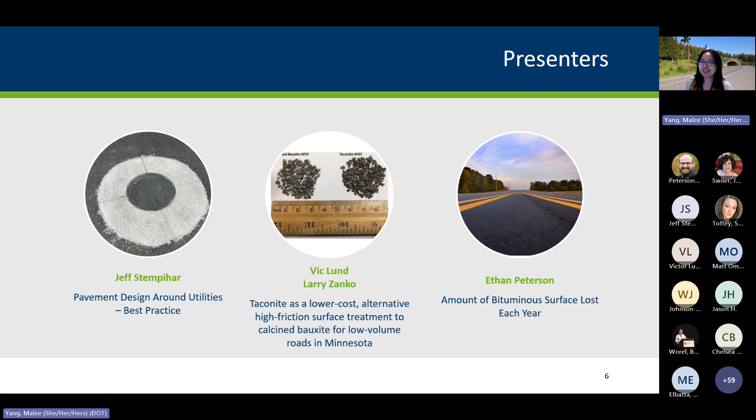The first one we'll kick off is talking about a study we did a couple years ago on pavement design around utilities best practice. This is very useful for local agencies. Utilities can be a source of maintenance, and so this gives some guidance on what we learned through various means of collecting data.

Some of the background is utility covers, they're typically adjusted during asphalt concrete paving projects, also concrete paving, but for local agencies, mainly asphalt concrete. They include catch basin inlets, manhole covers, and also gate valve covers.

Distresses are more pronounced in cold climates, such as Minnesota, especially when there's wet freeze and freeze-thaw cycles. Some of the impacts are reduced ride quality or potentially safety issues if there's large potholes. They can also damage snowplows that can impact the structures if they've raised up or if the pavement is settled. And then there's also additional maintenance cost to the agencies.

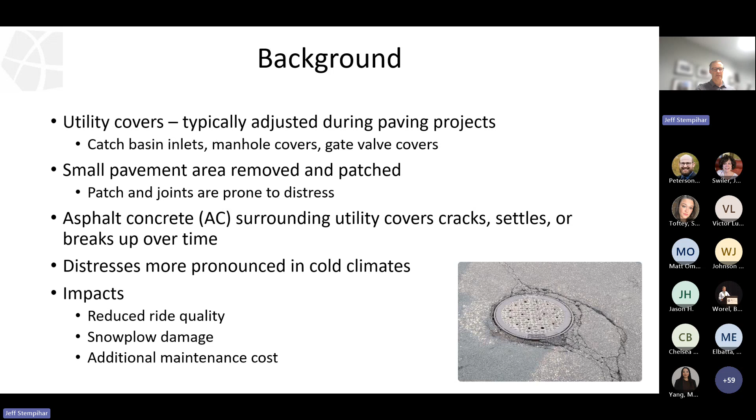There are two main types of cuts and materials used to adjust these structures. On the left, probably the most common is the square/diamond cut, and it's typically patched back with asphalt concrete material. The second one, and you'll see these throughout the presentation, is the round cut. It's after the paving is done, this one, contractor comes back and they actually core out or jackhammer out around the structure, and then they fill it with concrete material. In our study, this is used by fewer agencies, but it's gaining popularity and it's performing well.

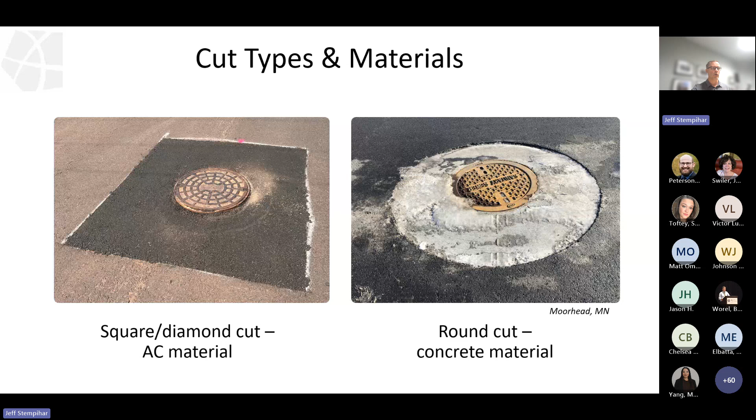How did we collect data? Well, we did a literature search, and without surprise, it's not well documented in terms of performance. But the key driver was the electronic survey sent out to agencies in Minnesota and in surrounding states. We received 28 responses, which I felt was really good. Most of them were local agencies, one engineering consultant and one supplier. 67% of the responses were from Minnesota, a couple from North Dakota and one from Wisconsin. 5 of the agencies we contacted for detailed discussions and gathered a lot more information.

These graphs show an example of the information we collected. So on the left is the collar, material, and cut shape. And if you look on the bar that's around 70% total, most agencies use asphalt concrete for the patch and the square and diamond cut shape. But you can also see some use the round cut for concrete and asphalt.

On the right, when is the utility cover adjustment made? 76% reported that it's prior to paving the final surface lift. Some do it after, but I want to note that this is a key finding in the study, and we'll talk about it later. So keep this in mind, that prior to paving the final surface lift is important when you use asphalt concrete.

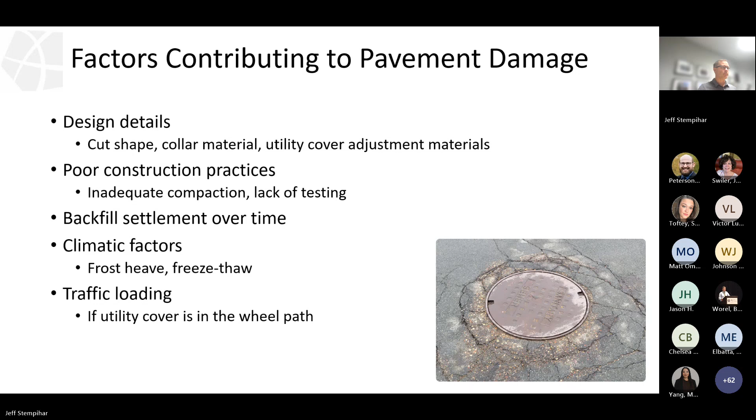I want to highlight a typical sequence of the square diamond cut. This one was shared with us from the city of Woodbury. First image is you cut out the pavement in a square or diamond shape, depending on the orientation with traffic, and expose the structure itself. After thoroughly cleaning, image 2 is they're actually installing plastic adjusting rings to get that cover to the right elevation.

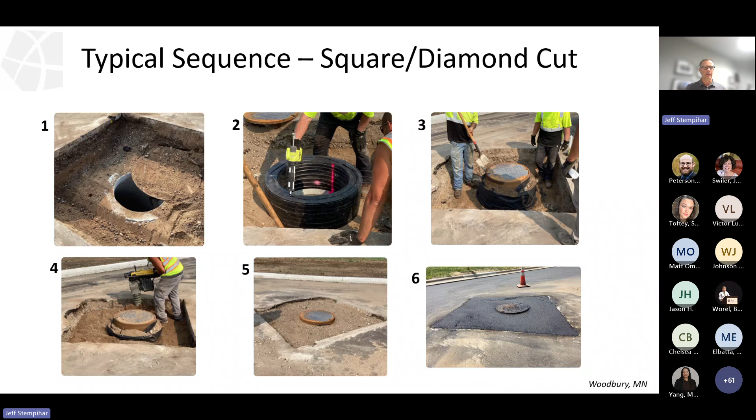Once it's at its elevation, the city actually uses a geofabric to wrap the structure to keep the intrusion of fines over time or to minimize it. They highlighted that it's very important, when backfilling, to use adequate compaction and do it in layers. Don't just fill the hole and then try to compact the whole lift of aggregate material. Image 5 shows the final, or the prepared base ready for asphalt concrete, and then 6 shows the patch in place. You can see there's still a gap at the utility cover because they're going to pave the final lift over the top of this.

I'm not showing it, but the sequence for a round collar is, as I mentioned earlier, they pave all the lifts. Sometimes if it's an overlay, they pave right over the structure cover, come back, core it out, or most commonly jackhammer out in a circle and then fill it back with concrete.

So now highlighting some successful regional practices that we found in the study. In terms of collar, material, and cut shape, a one-size-fits-all approach was not identified. Agencies have their preferred method, and based on some local tweaks to the process, they feel like they're getting decent performance.

So the study doesn't come out and say, hey, you should do this method. The square diamond with asphalt concrete has reported success, mainly if you do the work before you pave the final lift. Round cut, fewer agencies are using it. It's more on a trial basis, but it is reported success also.

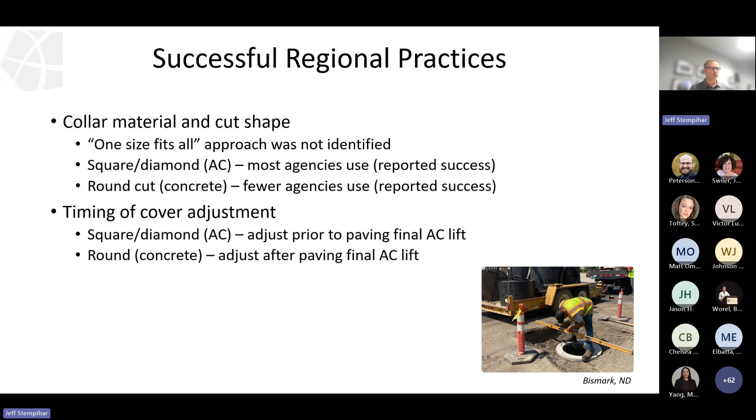In terms of adjusting the cover, as I mentioned several times because of the importance, it's important to adjust it prior to paving the final AC lift. If you pave the final asphalt concrete layer, come back and try to adjust and do the patch, typically the distress is accelerated, it shows up sooner and it's more severe, and you now have a joint at your surface around that patch. And again, with the round concrete, it's important, this one's done after paving the final AC lift.

In terms of the utility cover adjustment materials, there's standard materials and there's also commercially available products. Some things that came out is if you're using the concrete adjusting rings, the grout can fail early. There are non-cementitious adjusting rings that are showing promise, such as plastic that I showed you in previous slides.

And then there's also steel adjusting risers that can just clamp onto the structure, the existing frame, and then raise that up the right amount so that you can pave around it and put the new cover on without having to cut and patch the AC.

Sealing is very important, as I mentioned, geofabric. One agency actually casts the entire structure into concrete to help mitigate fines intrusion over time. Plastic adjusting rings were mentioned as a way to help have a better seal. There's also some commercially available products, floating castings.

Example is shown on the right. If you could see, there's a slot and some bolts so they can actually adjust the cover height. And this minimizes the need to patch as much, especially just in overlay situations.

You can see on the top, an example from Bismarck, this is an adjusting frame and cover. And you can see there's kind of a darkish red underneath the collar, and that's the part that's been adjusted up to the elevation of the final AC lift.

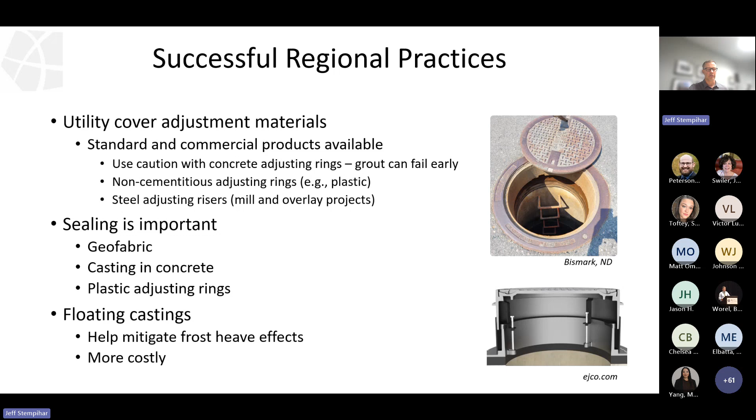Some agencies reported that these floating castings can actually help with the frost heave effects of the entire structure because it can be adjusted, but they are also more costly. And I have to mention the disclaimer: I grabbed this image from a commercially available product. The report doesn't endorse or recommend any specific products. These were just what were recommended to the researchers, or were shared with us during the study by agencies that use these products.

In terms of underlying material support, well-draining granular backfill material is very important. Adequate compaction, this can't be stated enough, is to get that compact in layers. You're working in a small area, so you're not going to get a roller in there, so you have to do the best you can with equipment that's available.

Again, compact in layers. In terms of testing and inspection, simple things to look at is make sure the structure is actually adjusted according to plans. Check that it's at the proper grade and slope so it matches that of the surrounding street. Attention to detail is important, okay? Check that it's sealed properly. Check that the contractor's cleaning the surface before they install the risers. Test density, that's on the backfill and the asphalt concrete.

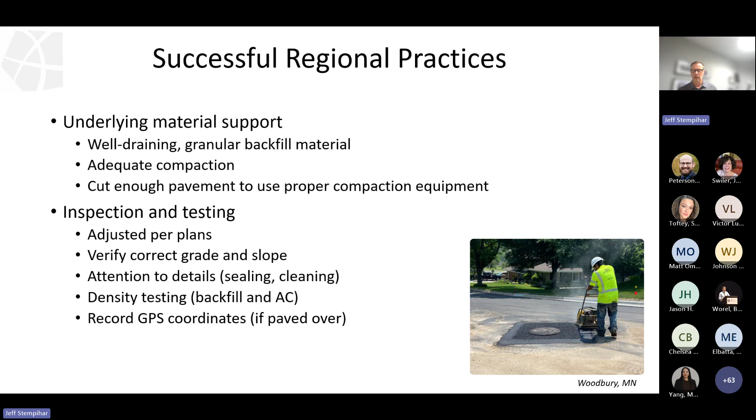And then if you're going to do the pave-over method and come back and do the circle cut, make sure you record the GPS coordinates or survey it so you don't cut out random areas and then have to patch areas of pavement where there is no structure.

Some other takeaways: the performance around utility covers is just not well documented. It's not something that gets into asset management plans, and recurring pavement inspections are not focused on utility covers. They look at the street itself. Most agencies said this is typically inspected during a design phase for a street or if there's a public complaint. So one idea that came up is to collect some information during pavement management inspections. You could ask your team doing the work to collect a sample around the city so that you can document how your structures are performing.

We found that maintenance is generally reactive, and respondents felt that we should move to a proactive method to slow deterioration. This could be active crack sealing and patching, not just in response to public complaint. And technology transfer across agencies is difficult. Folks are tied up with their responsibilities and roles, so oftentimes two adjacent cities aren't even discussing what they're doing to help improve their practices.

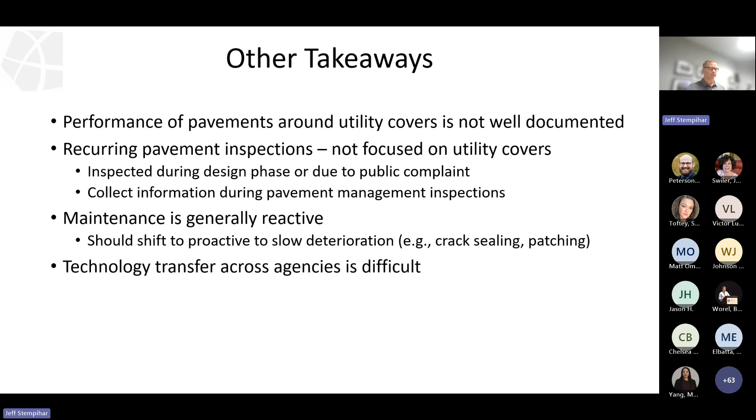Then we wrap up with a sequence to help folks evaluate and modify their practice. This is an iterative process. The key first step is you have to inspect. You need to know what you have out there and document the condition. You may find that your utility patches are performing well. It's not always the case, but you may be satisfied with the performance. The next step would be to evaluate your practices. Are we doing everything we can to ensure long-term performance? That might be reviewing your specifications, reviewing inspection and testing procedures, and taking an overall look at your practice.

The next step would be to conduct trials with improvements such as different cut shapes, different materials, different specifications, going back to the process of inspecting and going through it. Once an agency's happy, that's when you can implement it and make it standard practice.

Some other key takeaways: it's very important to have an internal champion or champions to drive the process. If there's not someone leading the effort, it oftentimes falls by the wayside and doesn't take shape. Collaborate with your neighboring agencies. There's a lot of information out there, and you may be able to collectively find strategies to enhance performance, then find what works best and implement it. As people learn your new practice, over time you'll get better performance.

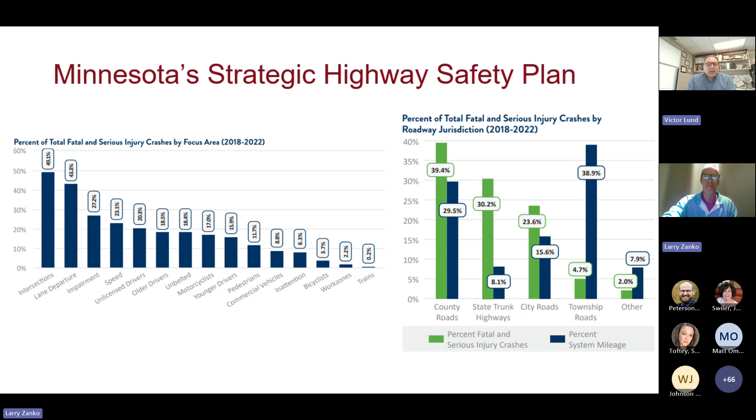Next slide. The Strategic Highway Safety Plan actually discusses high friction surface treatments as a strategy. It's a newer safety strategy that we're trying in Minnesota and nationally, but certainly it is a strategy that we need to be considering. Next slide.

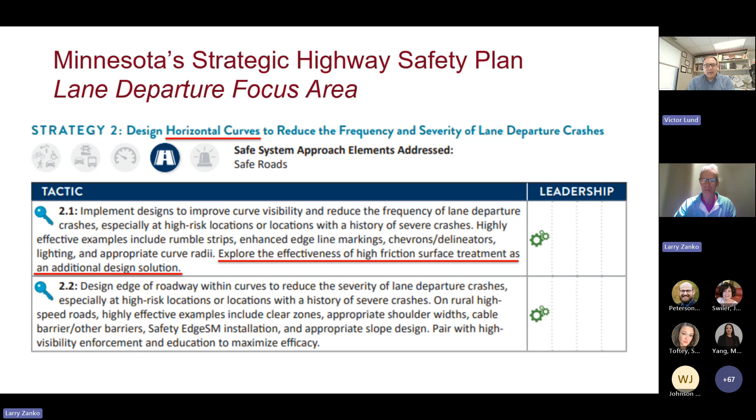All right, so if you picture when you're a kid and twisting a ball around your head with a rope on it, that rope provides the tension for the ball so the ball doesn't go flying out into space. That's what happens between your car tires and the pavement surface. Your tires are the rope to keep the car from going off the roadway.

And we think about improving curve safety. There's three variables: there's the radius, there's the superelevation, which is the subscript E, and then there's the friction, the factor F max. If we're going to reconstruct a curve to improve the safety of that, you'd have to reconstruct the radius, which is the R value. You'd have to reconstruct the superelevation, which is the slope of the curve. But we really don't have a lot of funding for that type of effort to go around reconstructing all these curves all over the state.

And again, they're the primary generator of all these serious lane departure crashes across the state, okay? So from just simply a cost management standpoint, we don't have the funding to reconstruct, but we do have one lever to pull, and that is the friction value. And so the ability to increase the friction value in that horizontal curve so that it reduces the likelihood of a vehicle running off the road, particularly if a driver is entering the curve at too high of a speed for the maximum speed for that curve.

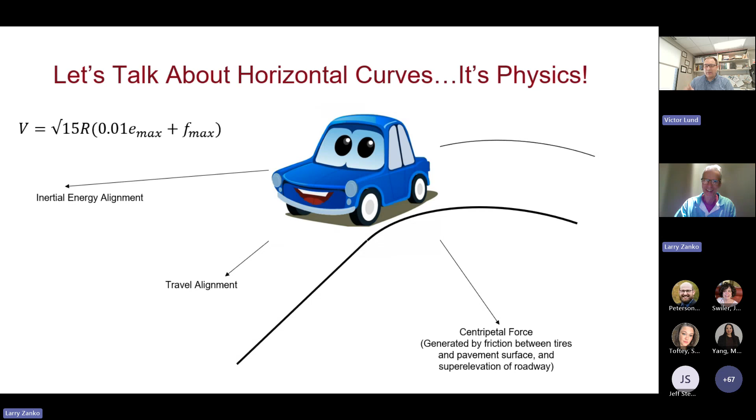My vision as a county engineer for this high friction surface treatment stuff, I think it's definitely a safety strategy of the future. We have very few tools in the toolbox to improve safety, particularly for lane departure, and this is one of those strategies. Currently very expensive, but as you're going to see with the presentation, we might have an opportunity here to utilize a lower cost HFST, high friction surface treatment, that will allow us to deploy this to much larger volumes of curves. So thanks, Larry. Go ahead.

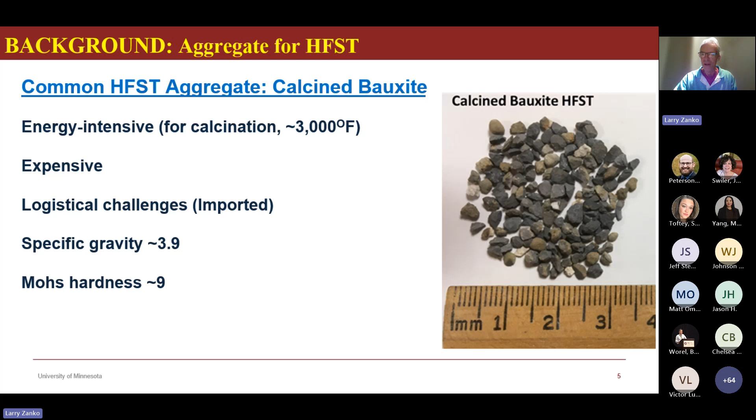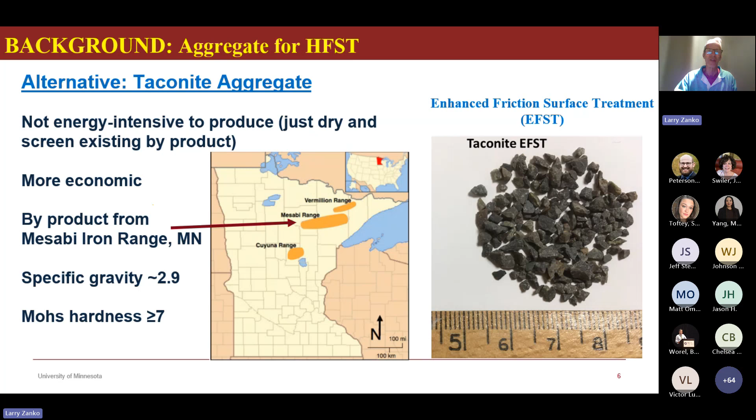The alternative that we looked at during this project is taconite aggregate. It's not energy intensive to produce. It's essentially just drying and screening an existing byproduct, which are taconite tailings from the iron mining industry in Minnesota. It comes from the Mesabi Iron Range, shown by the arrow there, and has a specific gravity about a quarter less than calcined bauxite, and its Mohs hardness is greater than or equal to 7. So not quite the same hardness as calcined bauxite. But we wanted to show these two aggregates in a side-by-side application and assess how they performed over time.

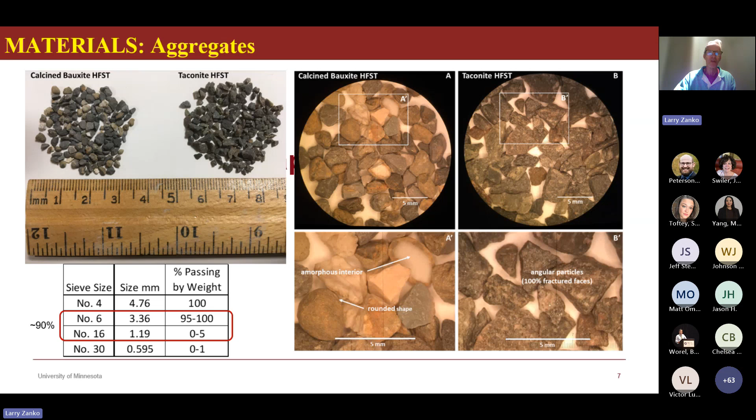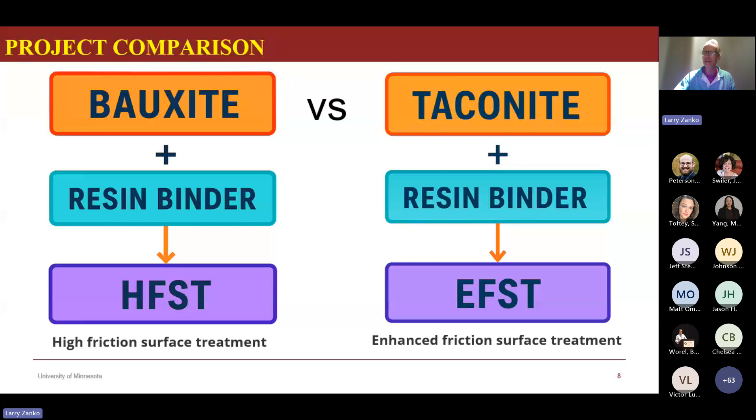You can see the microscopic images, the taconite on the right, generally 100% fractured faces. That's just the nature of how the material is made by the processing of taconite iron ore. The bauxite on the left; the spec for the size distribution is shown on the lower left, roughly 100% passing the number 6 screen, and very little passing the number 16. So those are the two aggregates side by side. The thrust of the project was to compare bauxite versus taconite, referring to taconite in our case as an enhanced friction surface treatment, or an EFST.

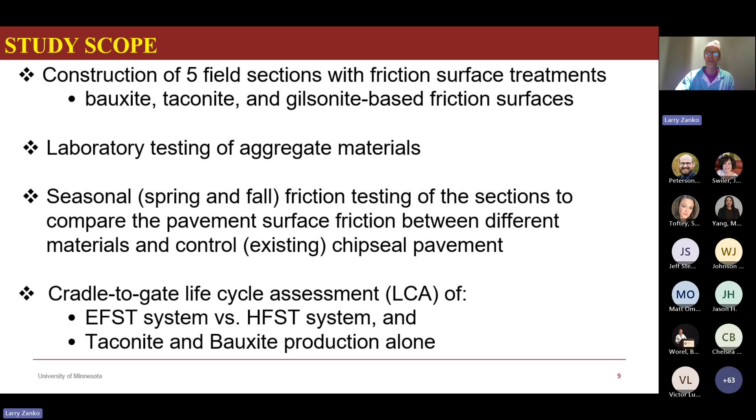The scope of the study was to construct 5 field sections with friction surface treatments, bauxite, taconite, and then we also looked at a gilsonite-based application, which is more of a pavement preservation, but with taconite applied. Laboratory testing was done. We did seasonal testing, spring and fall, before and after snow plowing, throughout the project, and also conducted a cradle to gate life cycle assessment of the systems themselves, and then the production of the material alone.

The test sections were located again on County State Aid Highway 15. We refer to that as Munger Shaw Road. And 5 sections that we looked at: the control, which we call number 0 on the south, continuing north, the 2 gilsonites, and then the focus of this project was really on the 2 HFST type systems with taconite and bauxite,

again, as the focus. I wanted to point out that in 2020, St. Louis County installed a calcined bauxite HFST on the horizontal curve just to the south of our test site. So that's that inset on the map on the right.

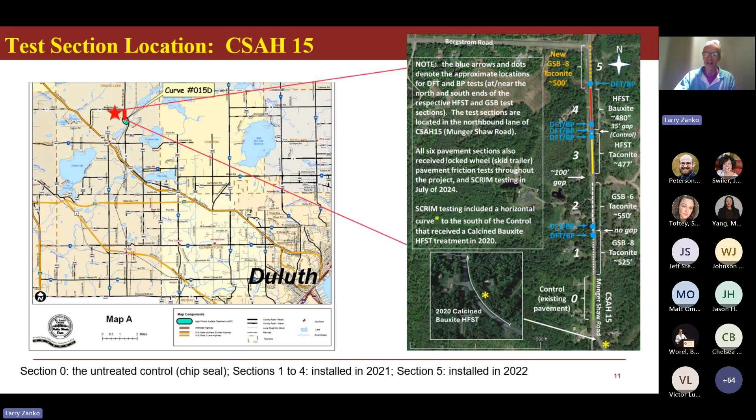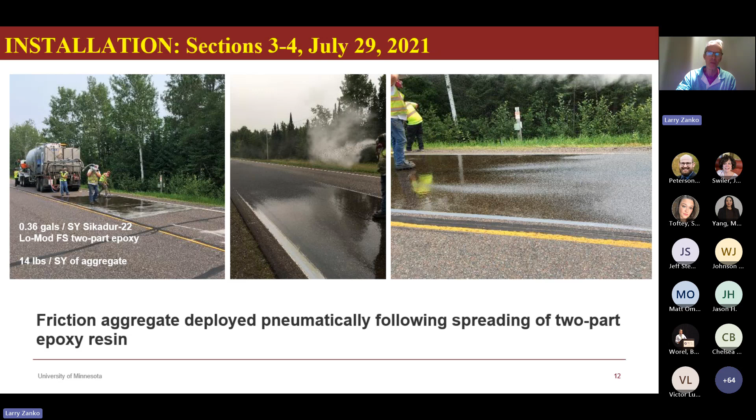Installation was pretty straightforward. That was done on July 29th of 2021. A 2-part epoxy resin was put down. The aggregate is broadcast pneumatically and spread over the surface of the resin, and that's essentially how it's done. There's another option where an automated system can be used as well, as opposed to the pneumatic. In this case, a pneumatic system was used.

Following installation, this is what the material looked like. The taconite on the top in the middle, shown next to the existing chip sealed pavement, and then the bauxite below that. Again, the 2 aggregates on the right, just for reference.

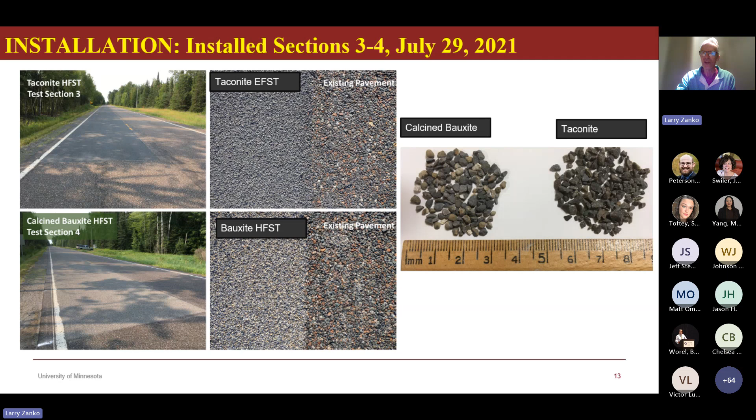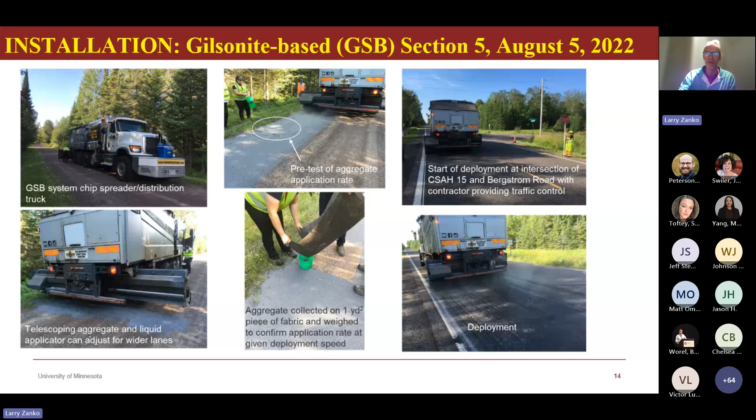The gilsonite-based, or what we call GSB systems, used a chip spreader distribution truck that deployed the pavement preservation emulsion and the aggregate simultaneously. It's very quick installation. To do one of the test sections, it took about a minute. Then it requires some time for the emulsion to break and set. But it's a different type of an application. This is not a substitute for HFST. We just wanted to look at a potential option for using taconite material as an aggregate.

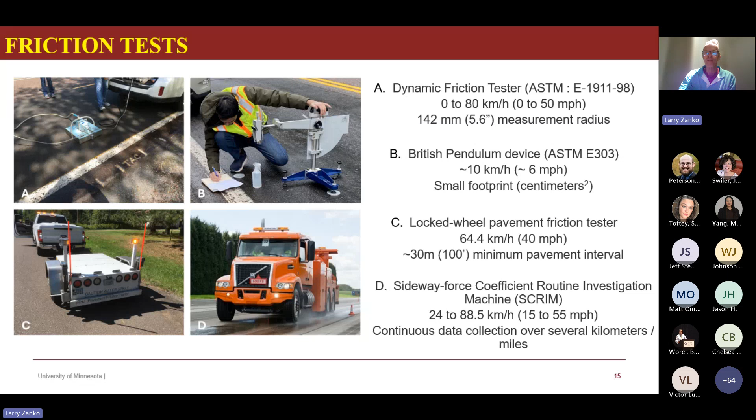Friction tests included 4 types: dynamic friction tester on the upper left, British pendulum shown there on the upper right, locked wheel pavement friction tester by MnDOT, lower left, and then the SCRIM, which is the sideway force coefficient routine investigation machine. I'll only say that once. We'll just call it SCRIM. And those were the 4 methods that we used to evaluate the pavements.

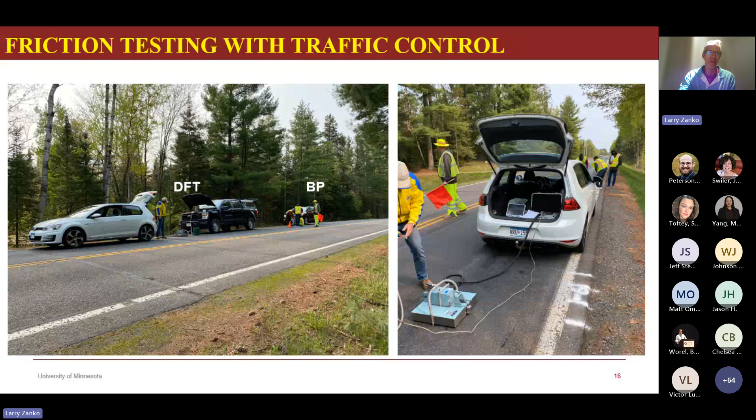Friction testing began, of course, with traffic control. St. Louis County provided that throughout the project. We would set up with the DFT and the BP simultaneously. We had a lot of assistance from students from UMD and also from the University of Minnesota in the Twin Cities.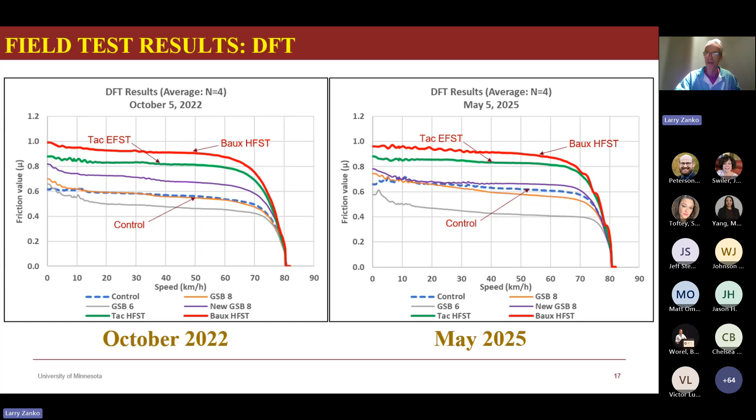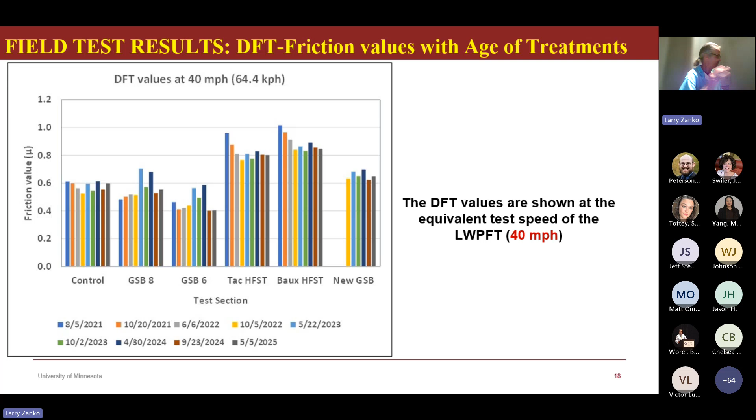Again, this is a histogram showing the DFT at the equivalent speed of the locked wheel pavement friction tester, which is 40 miles an hour, starting from August installation of 2021 through the end of the project of May of last year. And you can see the 2 taconite and bauxite HFSTs really stand out in terms of their friction properties relative to the other pavement applications.

And the locked wheel pavement friction tester, these were tests that were run by MnDOT at least once a year, sometimes twice. Again, showing the relationship very similar to what we saw with the DFT, with EFST, HFST, taconite, and bauxite clearly higher, providing high friction numbers relative to the others.

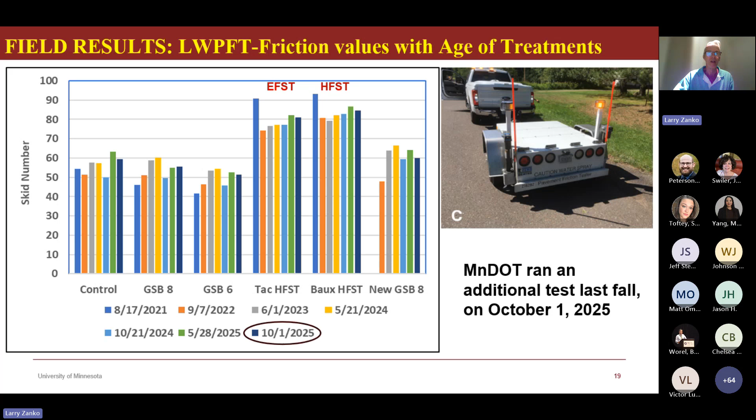Again, looking at it in a line graph, the control, taconite, and bauxite, again, considerably higher, typically about 35, 40% to 50% higher than the existing control pavement. But the key again, notice a lack of divergence between the taconite and calcined bauxite friction treatments over time.

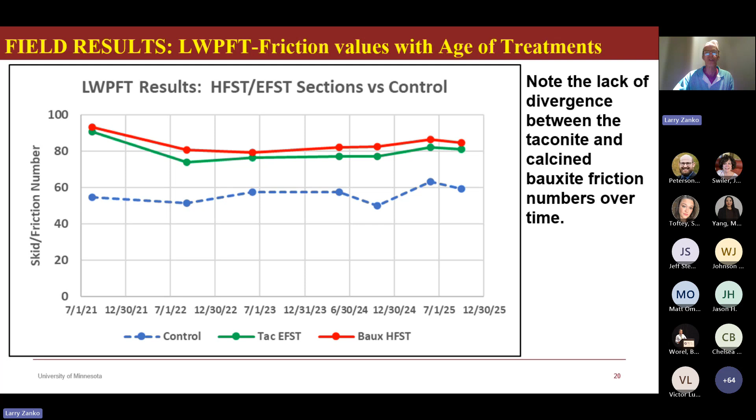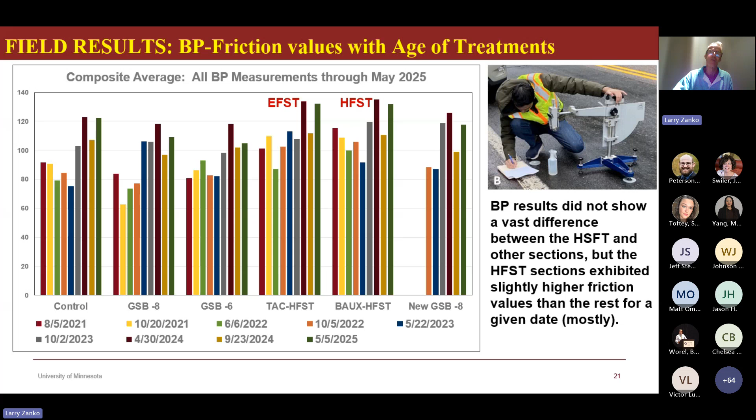British pendulum was another method that we used. It's a good laboratory instrument. It's inexpensive. It's easy to run, but the differences aren't as pronounced. You can see that there is a slight elevation of both EFST and HFST treatments relative to the other treatments. But again, it confirms what we saw with the other two tests. But I think the BP is better used as a laboratory instrument rather than as something that's more indicative of what the DFT and the locked wheel were telling us.

And finally, the SCRIM, well, I guess I'll say it again, Sideway Force Coefficient Routine Investigation Machine, was made available to us by WDM, the company that runs it. And I have a short video you can see.

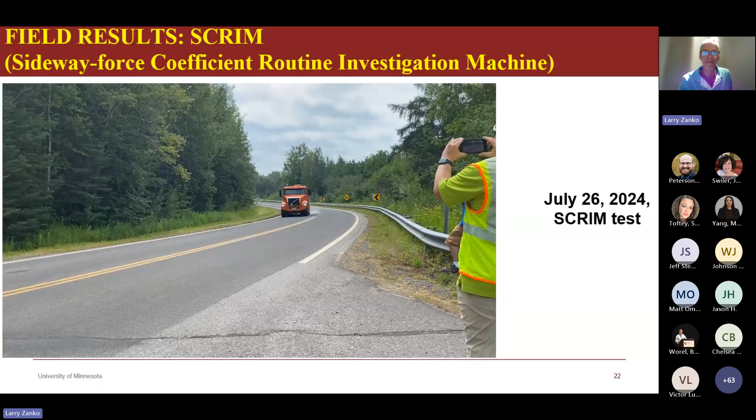And you heard that squealing sound—that's the tire attached to this piece of equipment. It's at a slight angle, so that's how it measures friction, and it operates at 40 miles an hour, or any number of speeds, doing miles or kilometers of testing in real time very quickly, and it's all georeferenced. So it provides a lot of data, including pavement texture.

Notable is how the two sections we installed compared to the section installed in 2020—very comparable, even slightly higher for both. The neat thing about the SCRIM is that its resolution is so good it picked up some pavement repairs done on the two HFST sections, which were asphalt patches. You can see the drop off in friction that coincided with those patches, which is kind of a neat thing.

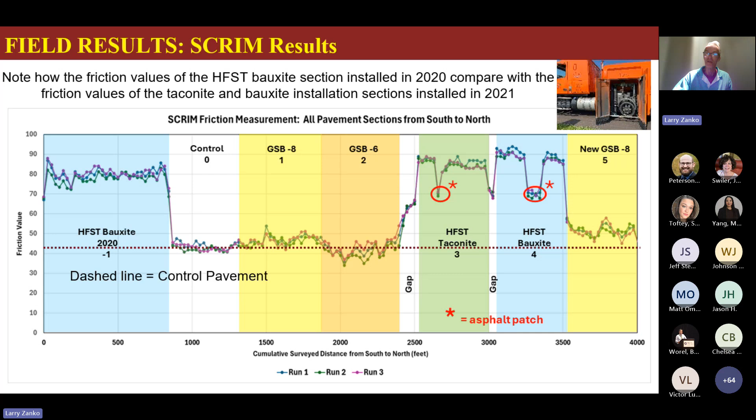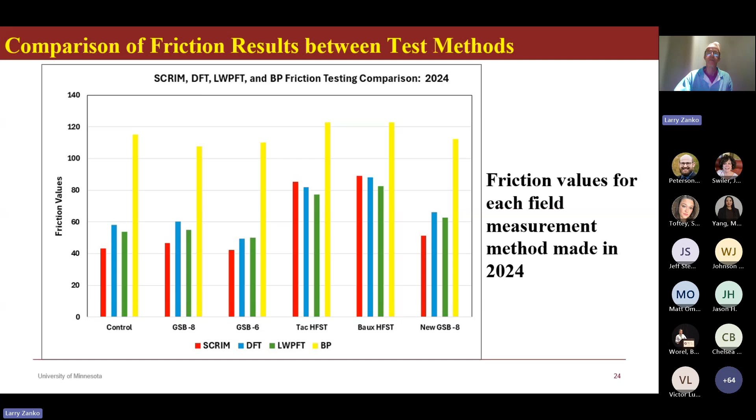Finally, the comparison of all four tests done coincident with the SCRIM treatment, showing the SCRIM on the left in red, the DFT in blue, the locked wheel pavement tester in green, and finally the British pendulum in yellow. Basically, they all show the relationship with friction number fairly well, more strongly with the DFT, the locked wheel, and the SCRIM. Just to reiterate, the DFT and the locked wheel showed really good agreement in their numbers—good correlation.

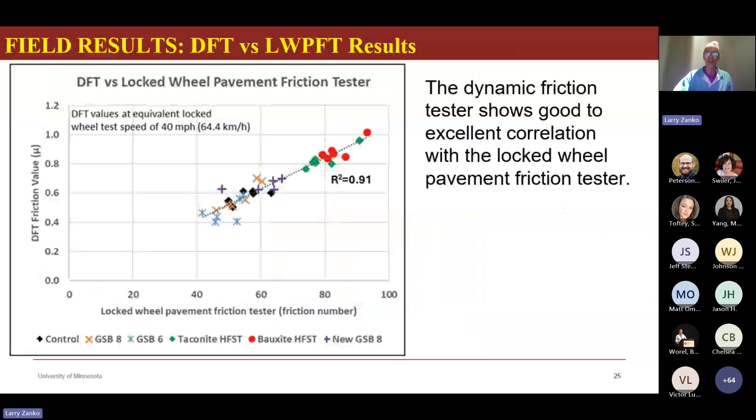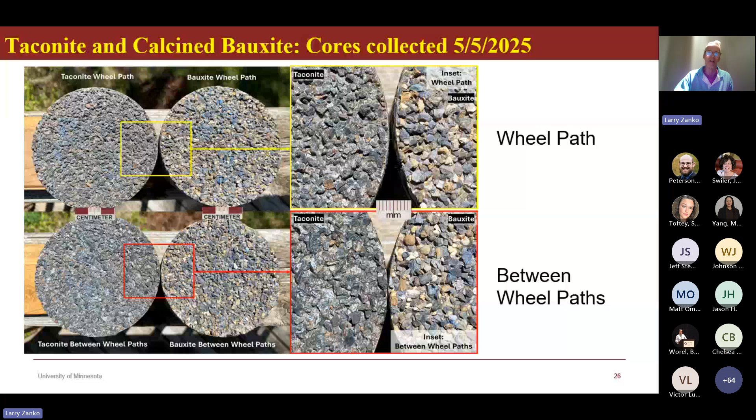Finally, looking at the aggregate in 2025, just to give you an idea of what the appearance looked like. Cores were collected by St. Louis County, and you can see there's really not much change or difference between the two aggregate types in terms of their wear. They're still maintaining good profile and reflected by their friction numbers.

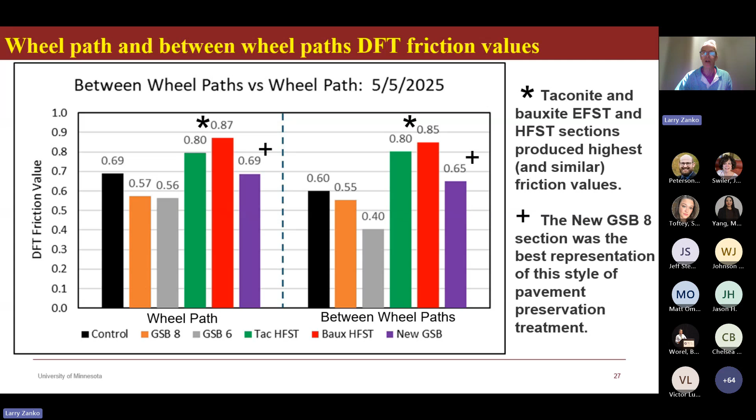And then we looked between the wheel paths and within the wheel path, again with the HFST sections performing quite well relative to the others in terms of friction values. With that last GSB section, the new GSB as we refer to it, looking pretty well as well—again, that being a better representation of that style of pavement preservation treatment.

An LCA was done, cradle to gate, to compare the two HFST systems—taconite relative to bauxite, shown in that orange color.

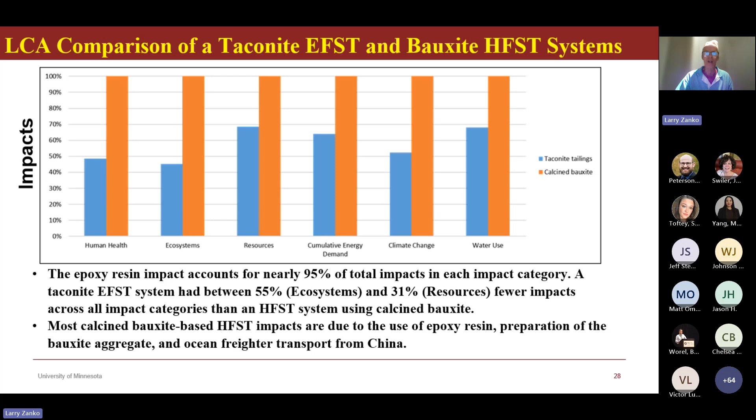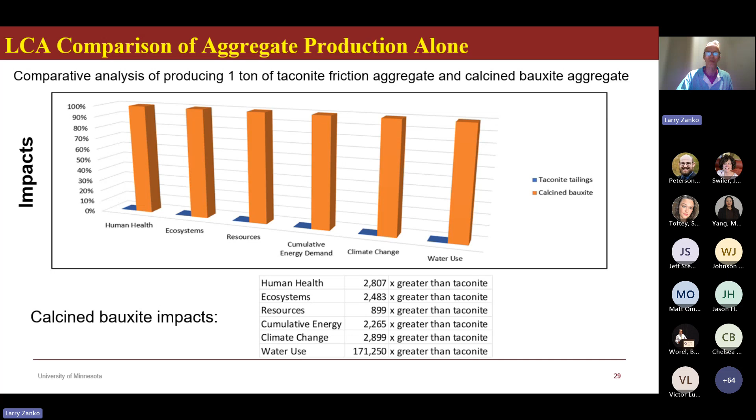The epoxy itself accounts for a huge impact regardless of which aggregate is used—it accounts for nearly 95% of the total impacts in each category. But you can see the difference between bauxite and taconite: taconite was typically about 30 to 55% lower, with lower impacts than bauxite in terms of a full system. When you look at the aggregate production alone, the difference is quite dramatic—bauxite being fired to 3,000 degrees Fahrenheit, shipped, et cetera. The environmental impact of taconite production of this aggregate type is 2 to 3 orders of magnitude less than bauxite.

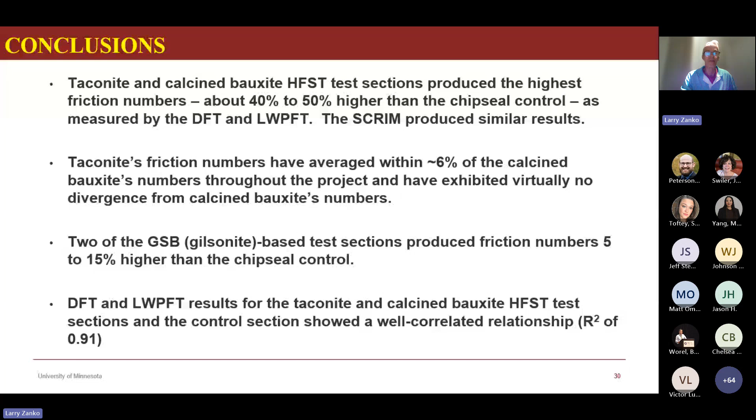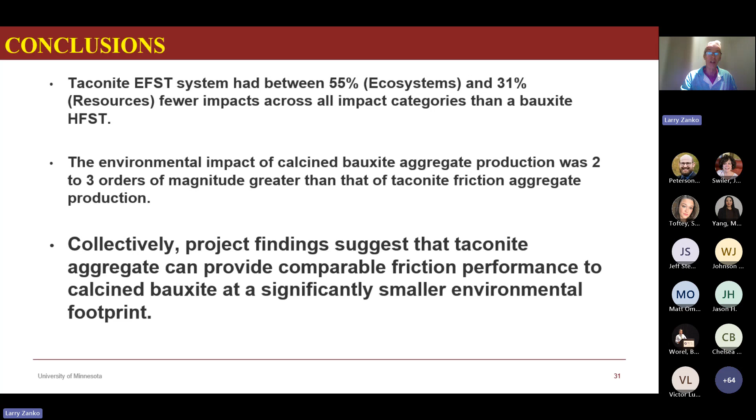So in conclusion, the taconite and calcined bauxite produce the highest friction numbers, about 40 to 50% higher than the chip seal control. Taconite numbers were maintained within about 6% of the calcined bauxite throughout the project, so really no divergence at all in their friction properties. A couple of the GSB systems did pretty well, about 5 to 15% higher than the control. The DFT and locked wheel pavement tests show really good correlation. Taconite, as we discussed with the LCA, has lower environmental impacts. Collectively, we think these project findings suggest that taconite friction aggregate can provide comparable friction performance to calcined bauxite at a significantly smaller environmental impact footprint.

So, recommendations for future study—we've gotten feedback from people out at TRB, et cetera. These were done on tangents; none were done on a horizontal curve.

So that's what our next, what we would hope to be a follow-up project would be: to apply this on horizontal curves to get more confirmation data on that.

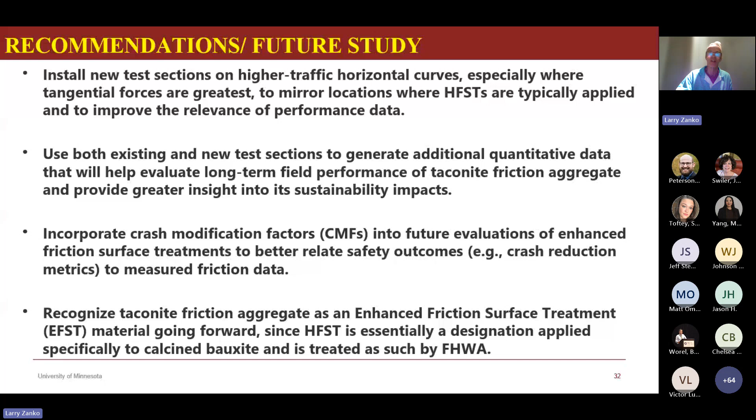Likewise, we'd incorporate crash modification factors into future evaluations, and lastly, recognize the taconite aggregate as an enhanced friction surface treatment, EFST. Since HFST has basically been appropriated by that part of the industry, I'll be blunt, and is also treated that way by FHWA, it's more of almost a branding thing.

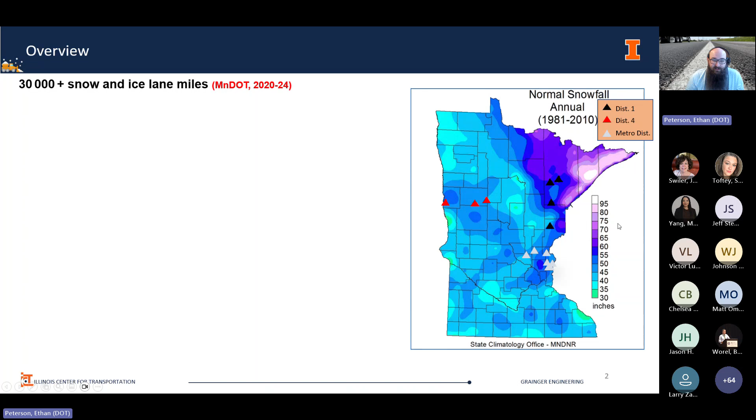So what we tried to do was find differing areas. We looked at the metro area, where a predominant amount of our population resides; D1, where we get the most snowfall in the state, so we'll have more snowplows up in that area; and D4, which has pretty heavy wind, and ice is maintained on a lot of those roads throughout the winter season. So we wanted to look at all these areas and figure out how much we're losing in these types of areas.

And as I alluded to, there are three main reasons why we want to look at this.

Selfishly, from my aspect, I want to look at the markings. We do groove-in pavement markings in this state on most, if not all, of our new surface markings. So do we need to be grinding in our markings deeper? Or are we putting them at the right depth currently?

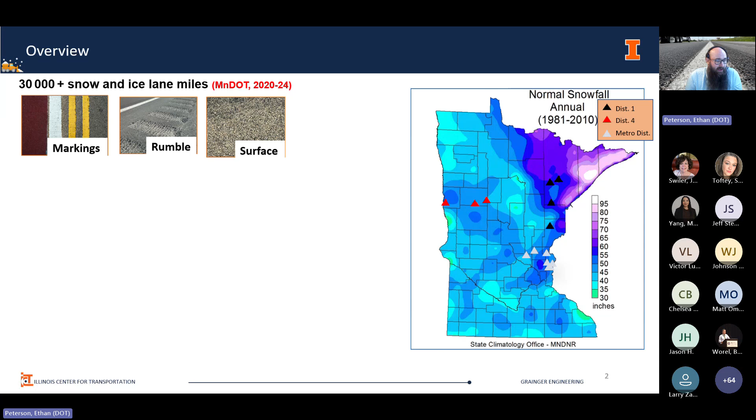Rumble strips, both of these items are a very high value safety item, and low cost as well. So we want to make sure that these are being maintained throughout the surface's life, or as close as we can get to that. We also want to figure out how it affects the surface, right? We know it won't be the same as what was installed, and we want to track and see where it goes with all of our snowfall and snowplow activities.

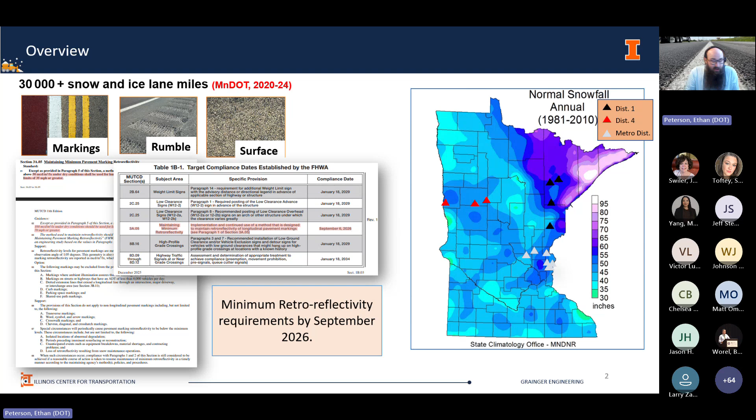The big thing here is that there is a minimum retroreflectivity requirement being put on us by the feds, coming September 2026. Minnesota is well positioned to meet that, and we actually started with that standard they're putting on us a few years back already.

So the timeline for the project, I will say we're near the end of it. At the end of this year, this project should be wrapping up. The first step was a literature review and survey, seeing where people were and what they felt they lost throughout winter seasons. There was a field study where we found areas, worked with the districts, made sure to get traffic control for the group, and got out there and took initial measurements, doing it through a couple winters, and we'll see how it ends up.

And then we will end up in the analysis and recommendations phase coming up here. I will definitely give you what we're seeing at this point as well.

So retroreflectivity, why is it important, right? This is the primary factor of actually providing light back from your headlights and showing the pavement marking on the road, sending it back to your eye from the headlight to the bead. It refracts, hits the actual marking, as we see here, and then reflects off the marking, refracts back to your eye. This is the standard 30-meter geometry that they typically look at.

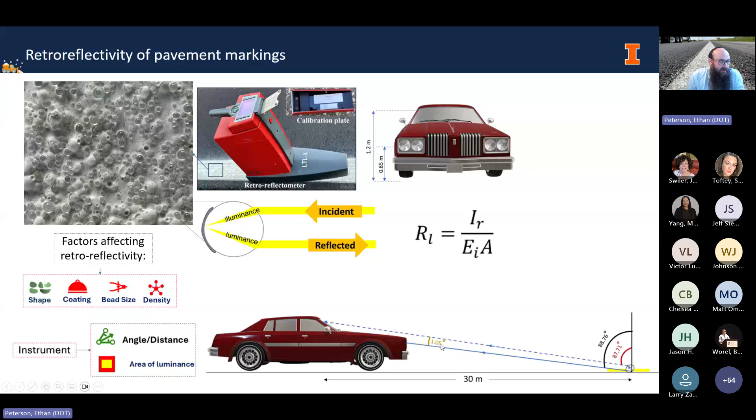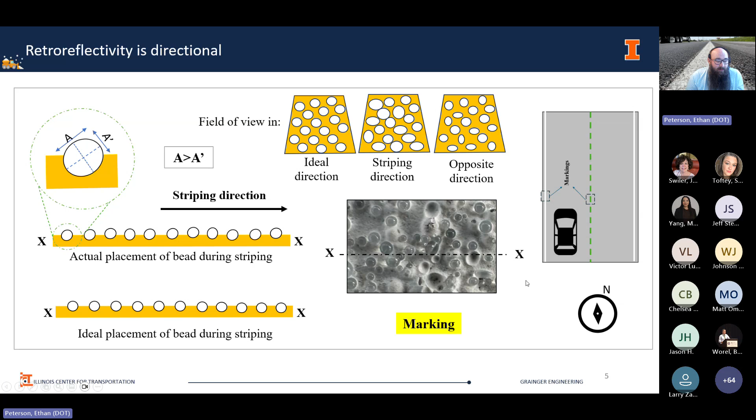One of the interesting things about retroreflectivity is that it is directional. You can easily tell which direction a pavement marking was striped, because retroreflectivity will be higher in that direction. The angles of the glass beads we put in fall more optimally in the direction of striping, and in the opposite direction it's not as optimal. But for yellow center lines, we do read them in both directions with a laser, calculate the retroreflectivity, and make sure both directions meet our minimum retros at the point of installation.

So what else can we look at with pavement markings? We're taking a look at how they wear and where they wear. Here we see before winter and after winter - this is close to a brand new marking, and this is after winter, where it's been abused quite a bit and seen UV degradation. You can also see debonding pointed out here, which is attributed mainly to construction quality. Dislodgement, referring to the glass beads in the pavement marking, is largely due to traffic and plowing. Shaving is also largely due to plowing. As we've alluded to, we lose pavement, and we're definitely losing pavement markings at that point as well.

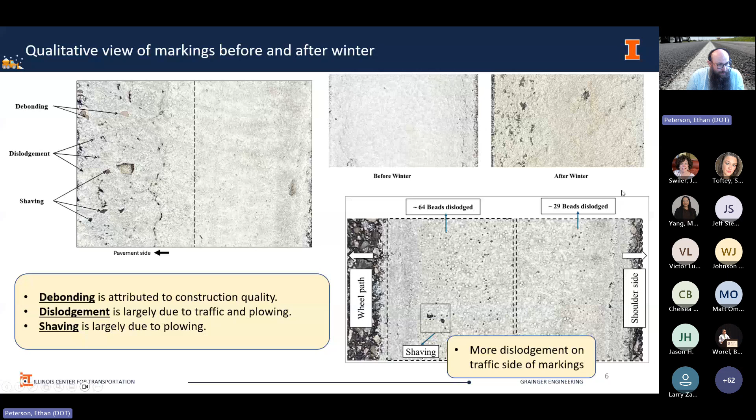This is just a highlight of showing what they can capture. You can see around 64 beads were dislodged here in the wheel path, highlighting that the wheel path takes a heavier beating because tires frequently go over that. As much as we wouldn't like that, we know that's a reality.

That dramatic drop may also be due to the initial drop for new markings - new markings typically get hit pretty hard after the first season. Degradation of retros really isn't linear; it takes a pretty big hit initially and then tapers off afterward.

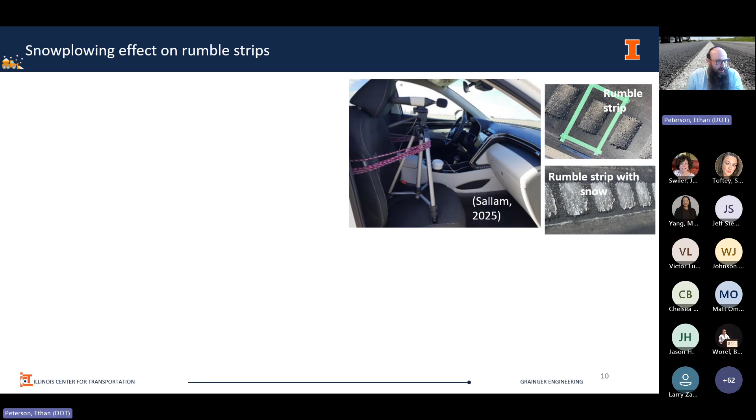We have 2 different predominant types of rumble strips in Minnesota. This is what we call a rectangular corrugated rumble strip, which is a plunge cut. We also have what's called a sinusoidal rumble strip, which is a wave pattern completely under the surface, that goes into the pavement and gives you tactile and audible feedback.

The interesting part here is that we've seen an increase in decibel levels over ambient in the vehicle for rectangular corrugated rumbles after a winter, but we've seen a decrease in sinusoidal rumbles after snowplow hits and wear. So as we've noticed in general, the corrugated rumble strips give you higher audible feedback and increase after a winter, which is neat.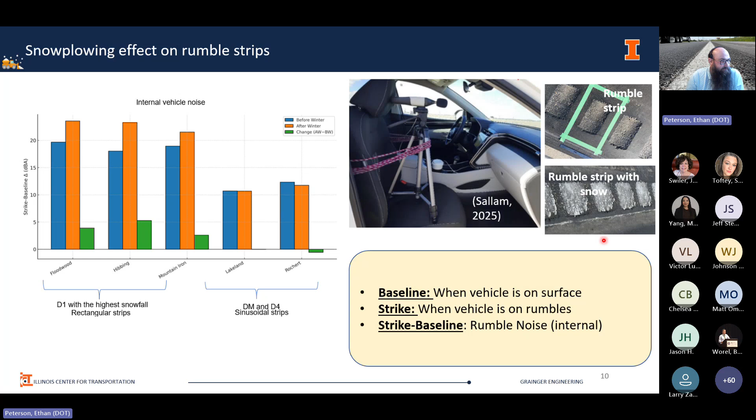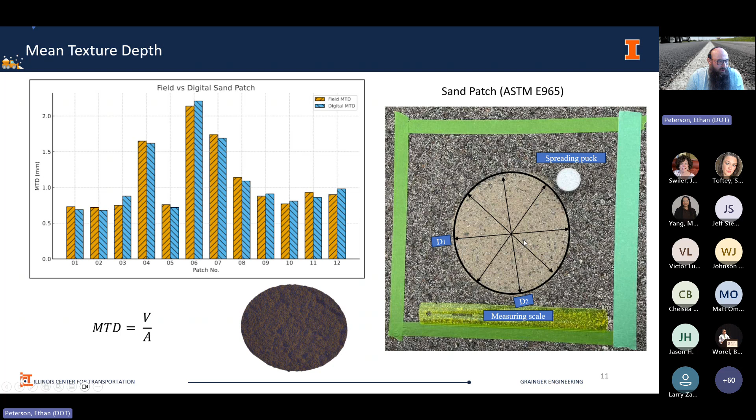Other readings taken here include mean texture depth, where they fill a portion of the roadway with sand, and that sand is translated into a macro texture depth. This is just an example, and you can see how many patches they've done throughout the project. They get the real world measurement, and they also did a virtual one here.

They also looked at shape parameters, SSK (skewness) and SKU (kurtosis), which describe the distribution of the shape. This changed randomly after winter — valley textures either deepened, shifted to peaks, or moderated, with no clear centerline wheel path pattern, but it's still good data to collect.

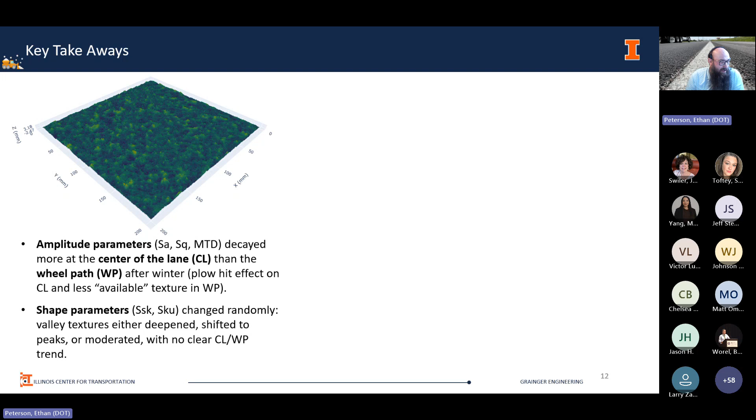As far as retroreflectivity goes, it degrades, but the cause remains kind of unknown — just elemental wear, snow plows, I'm sure. There's also a directional difference observed based on how it's installed. Rectangular rumbles became noisier in snowier districts, while sinusoidal rumbles showed the inverse.